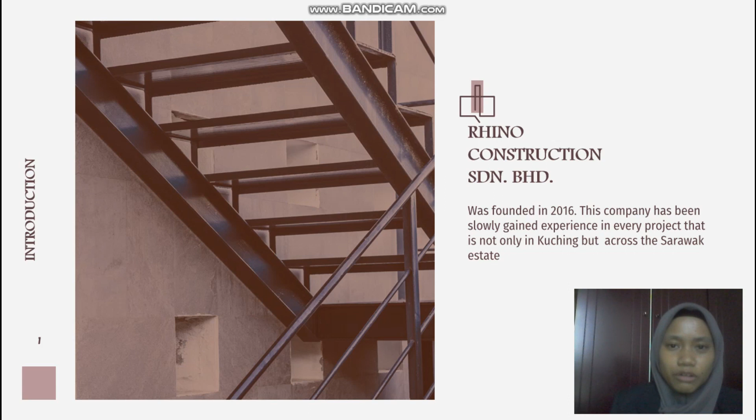Today I am going to introduce our company profile. Rhino Construction Sdn Berhad was founded in 2016. This company has been slowly gaining experience in every project, not only in Sarawak, but also in West Malaysia and Sabah.

Mission: our mission is to offer high quality service with reasonable cost in accordance with statutory practice codes of the products and integrity, and a good final product within specified time given. Vision: our vision is to become the most preferred choice by the employers and to be able to be listed among the top competitive companies with higher performance while enriching the communities.

This is our list of completed projects. The first is a purpose-built 78 unit semi-detached house, already done. The second is a new double-story project at 5 Mile Kuching at Samaba Park, completed in 2018. And the Kuching City Drainage project at Padang Merdeka.

Board of Directors: this is our director, Sandra as Chief Executive Officer, Nurul Amanina as Deputy Chief Executive Officer, Siti Nur Khalidah as Project Director, Courteney Ecynne Anak Jeffrey as Human Resource and Administrative Director, and I am Noor Hazmizah binti Kayat as Financial Director.

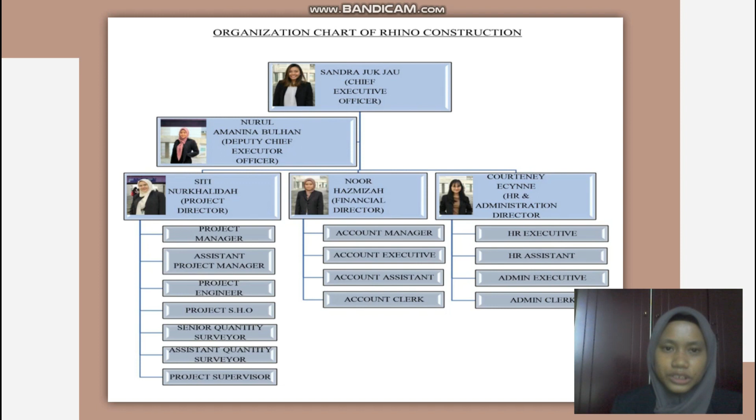This is the organization chart of our company. This is the list of our company registrations: Suruhanjaya Syarikat Malaysia, Lembaga Hasil Dalam Negeri, Construction Industry Development Board (CIDB), Bahagian Pembangunan Kontraktor dan Usahawan (BPKU), Unit Pendaftaran Kontraktor Negeri Sarawak (UPK), Kementerian Kewangan Malaysia (KKM), Kumpulan Wang Simpanan Pekerja (KWSP), and Pertubuhan Keselamatan Sosial Malaysia (PERKESO).

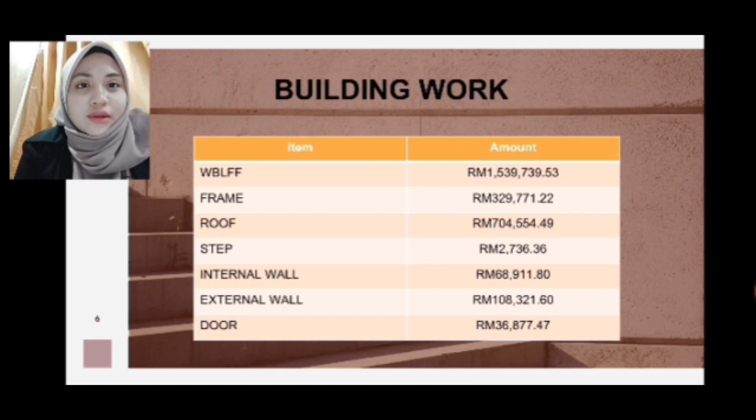2,736.36 ringgit Malaysia. The fifth one is internal wall. Internal wall is also a very important component in the building works, and the price of internal wall is 68,911.80 ringgit Malaysia. External wall and door, they got 14 items in the building works.

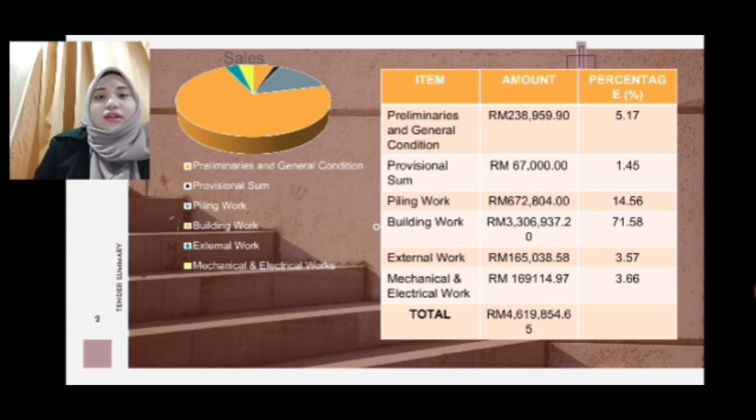As I mentioned before, the total of building works is really high, which is 3,306,937.20. So that's all for me. I will explain about another part, which is in the task break. Thank you.

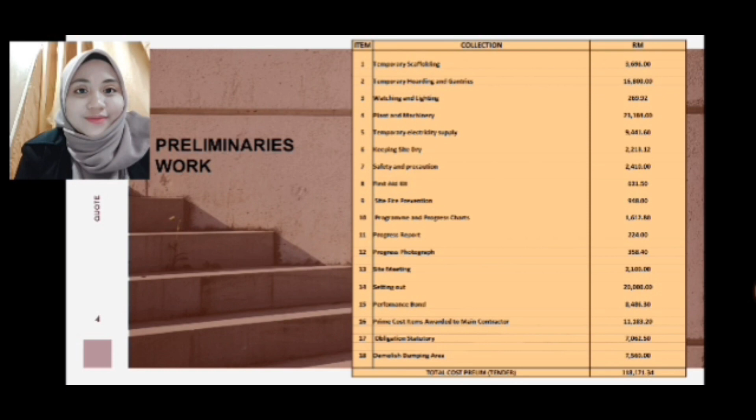So as for my part, I'm going to summarize the tender summary for task 2. The total summary for piling work is 672,804 ringgit. The material used is precast concrete pile.

So as for the next one, the total summary for building work is 3,306,937 ringgit and 20 cents. This table shows the elements for the building work included for the construction project, which is work below lowest floor finish around 1 million, frame 300,000, roof 700,000, step 2,000, internal wall 68,000.

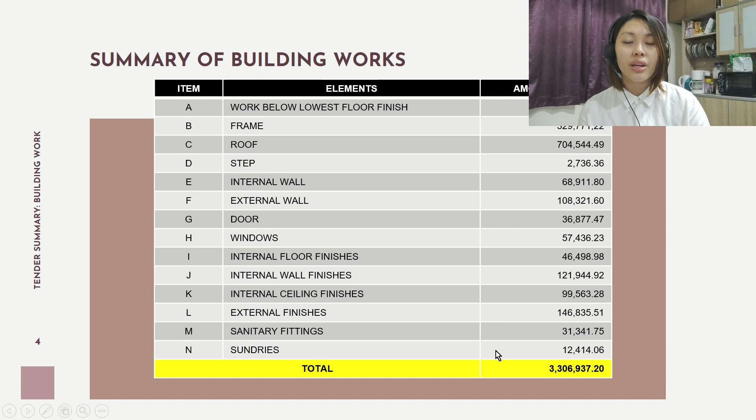External wall 104,000, 108,000. Door 36,000. Window 57,000. Internal floor finishes around 46,000. Internal wall finishes around 121,000. Internal ceiling finishes around 99,000. External finishes 146,000. Sanitary fittings 31,000 and sundries 12,000. So the overall of the building work is around 3 million, 306,937 ringgit and 20 cents.

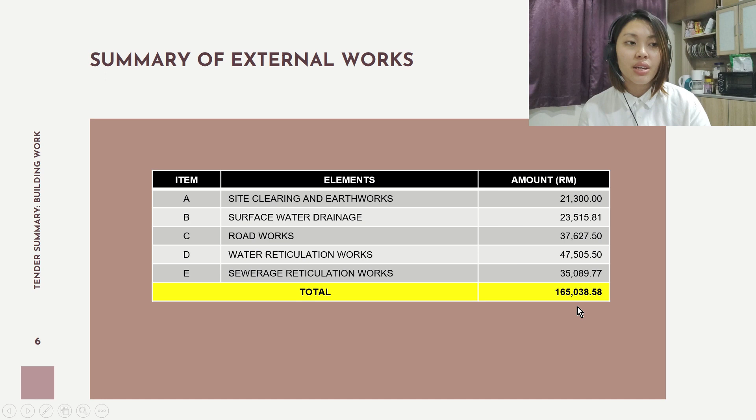And the next is the total summary for external work, which is 165,038 ringgit and 58 cents. And these are the elements included for the external work, which is site clearings and earthworks around 21,000, surface water drainage around 23,000, roadworks around 37,000, water reticulation works around 47,000, and sewerage reticulation works around 35,000. So the amount is around 165,038 ringgit and 58 cents in total.

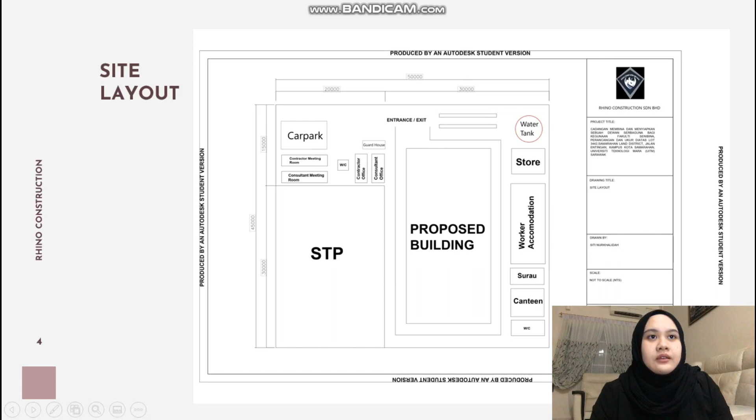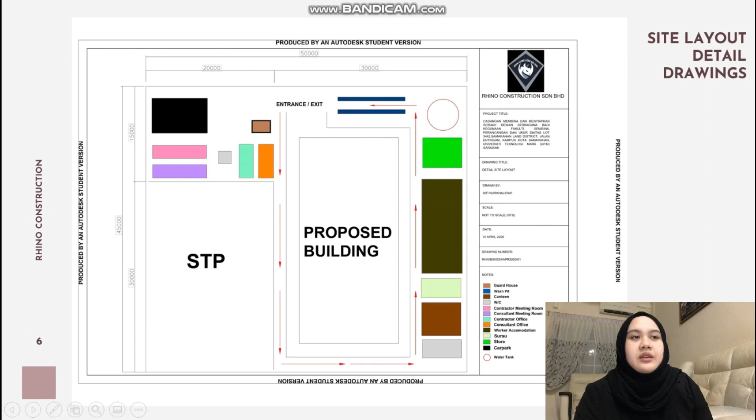Temporary buildings such as site office, meeting room, canteen, guardhouse, temporary storage, portable toilet, workers' accommodation, and wash pit, demolishing, dumping area, signboards, and so on - that is the temporary buildings.

And then the piling works. The piling works takes about 60 days, so it starts on 15th May 2020 and finishes on 23rd July 2020.

And then the building works takes about 315 days, so it starts on 10th June 2020 until 19th May 2021. This is all the building works.

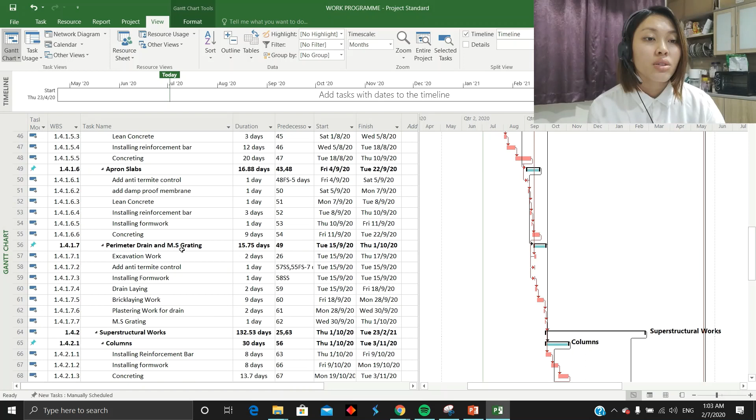After the excavation work is done, anti-termite control will be added because it is below ground level, to prevent termites from destroying the material and quality of the project. There is a minus 7 days here because the anti-termite control can be done right after the curing process of concreting for the apron slab.

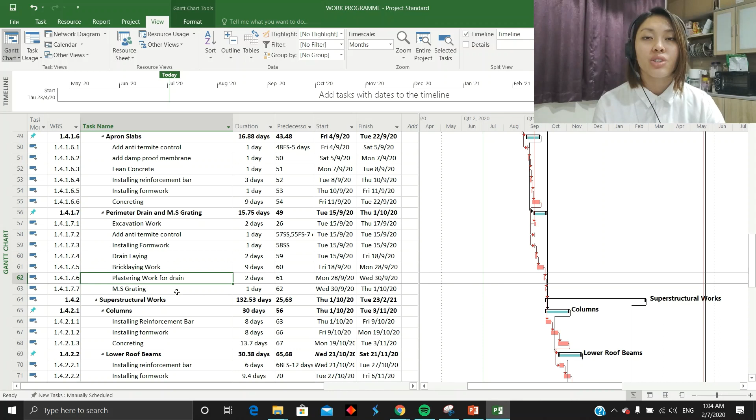After the anti-termite control, they will install formwork, followed by drain laying, bricklaying work, plastering work, and installation of the MS grating for the drain. After the perimeter drain is completed, the next task will be the superstructural works, carried out right after the lower floor finish work is completed.

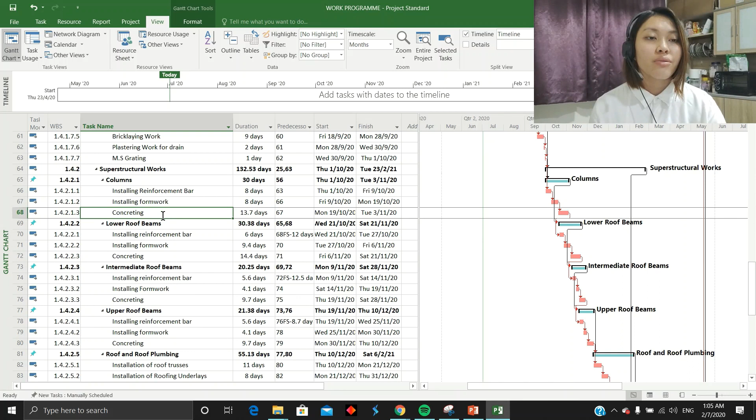The first task is the column, which compulsorily includes rebar, formwork, and concreting. After that, the next task is the lower roof beam. The installation of the rebar has a minus 12 days from this date, since the reinforcement bar can be done right after the pouring and concreting work for the column.

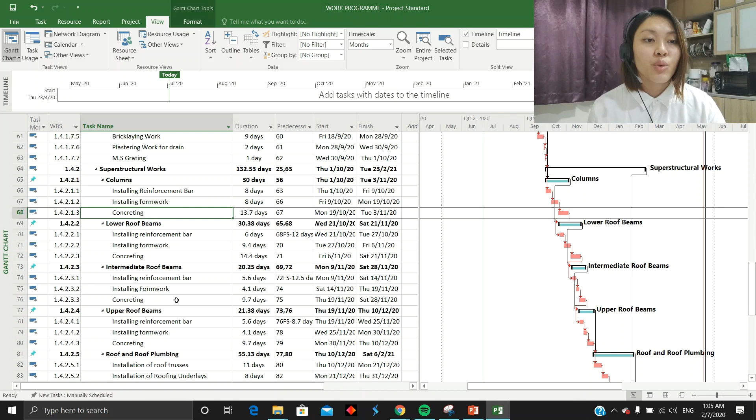After that comes formwork and concreting. After the lower roof beams, there will be intermediate roof beams. Similarly, the reinforcement bar can be carried out after the pouring concrete process is done for the lower roof beam, although it has to be done stage by stage. Then the next step is formwork and concreting.

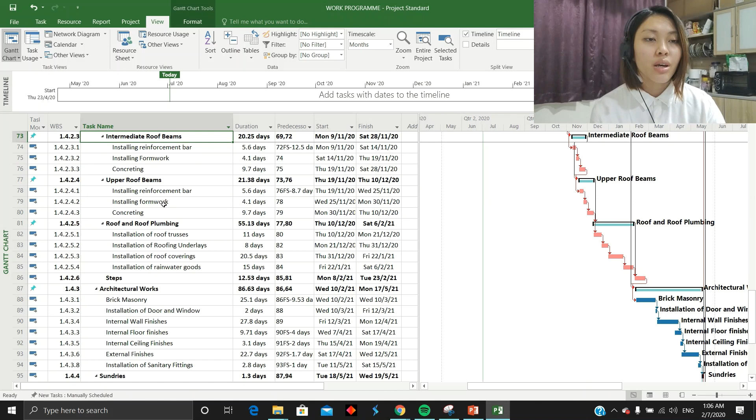After the intermediate roof is done, there will be an upper roof beam for the project. Here the rebar can be installed right after the pouring concrete process for the intermediate roof beam, followed by formwork, which can be done right after the concreting work. The last task for the upper roof beam will be concreting.

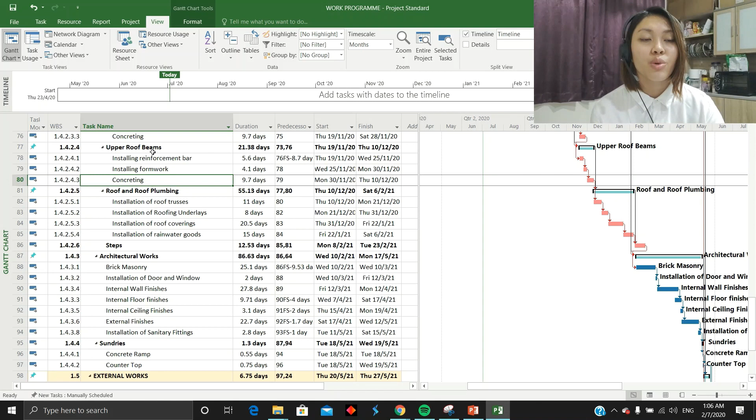Once the roof beam is done, there will be roof and roof plumbing. These tasks will be done in sequence to avoid being hectic. The roof trusses will be built in 11 days.

Right after the roof trusses, the roofing underlays will be constructed, followed by roof covering, which is zinc. After the roof covering, there will be rainwater goods — the last process for the roof and roof plumbing.

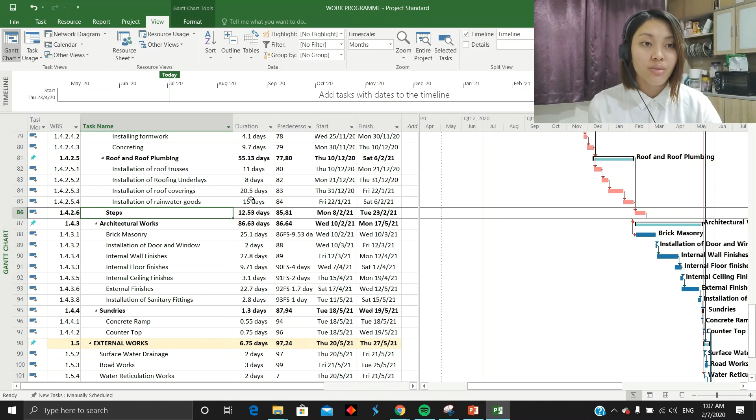After the roof and roof plumbing works are done, the next task will be steps or stairs for the hall of the project. The step may take up to 12 or 13 days — assume 13 days — and it is carried out right after the rainwater goods is constructed.

After that, there will be architectural work. The first archi work is brick masonry, including the internal and external works for the project. There is a minus 9.53 days here.

The minus 9.53 days is because of the curing day for the step, so it can be done right after the pouring of concrete for the step. The step is quite small, so it can be done quickly with only one or two workers needed. So to reduce the duration, the brick masonry should be done quicker.

After brick masonry is done, which includes internal and external walls as stated before, there will be installation of doors and windows. Doors and windows can be done in two days to reduce the duration, and it can be done very fast.

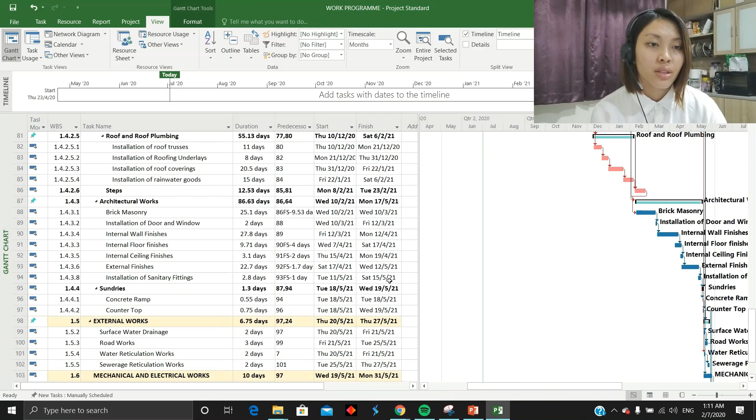So after that, the next external work is surface water drainage, and it can be done right after sundries, followed by the road works. As for the water reticulation works, it needs to be done at the very initial stage of the project, which is around right after site clearing and earthworks, to avoid unwanted problems or failures.

Because the water reticulation works is constructed below, under the building, it has to be done at the initial stage. After water reticulation works is done, the next task will be sewerage reticulation works, which can be done right after water reticulation works. So the next one will be M&E works, mechanical and electrical works. M&E work can be commenced right after the completion of sundries, or right after the completion of the building works, to avoid messy and hectic problems.

After the M&E works is done, then there will be the professional sum. For the signage, it can be done right after sundries too. For the flag poles, it needs to be carried out right after the road works is done, followed by the built-in furniture, which will be constructed right after every task, every work for the project is completed. So it is the last physical work to be involved in the work program. According to this schedule, the project will be completed on 4th of June 2021.

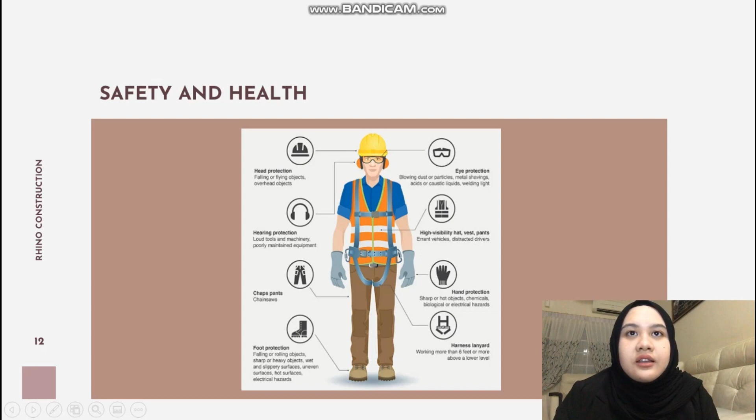Next is safety and health reports. This is basic safety and health: we need to wear head protection, hearing protection, eye protection, and all of this. This is the toolbox meeting, an informal safety meeting. It is a safety method of work on site.

This is the activity report. The types of accidents are: electric shock, minor injury, falling from height, specified minor injury, near miss, possible dangerous exposure, exposure to chemical, burn, and falling material. The total number of accidents for electric shock is 2, minor injury is 3, falling from height is 2, specified minor injury is 1, near miss is 3, possible dangerous exposure is 2, exposure to chemical is none, burn is none, and falling material and equipment is 3.

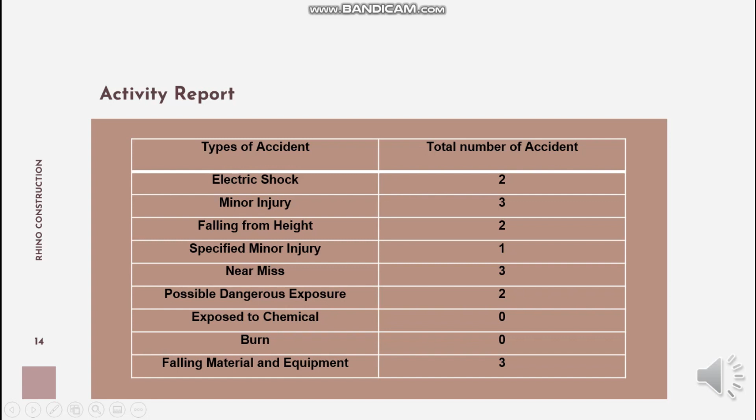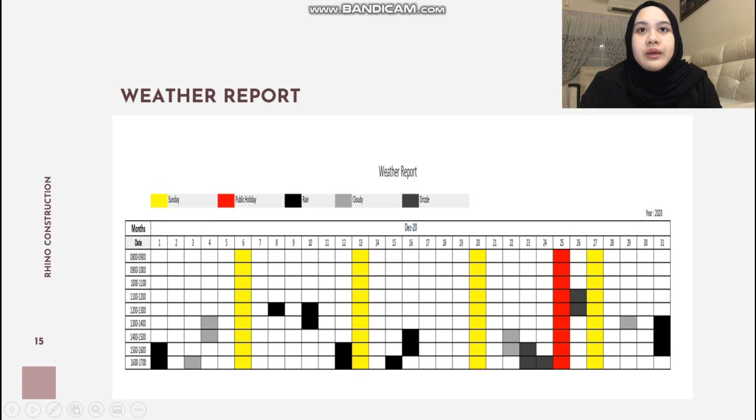Next is the weather report. So this is the weather report. The yellow is Sunday, and the red one is public holiday. The black color is rain, the light gray is cloudy, and the dark gray is drizzle on the weather. So this is the weather report.

Now I am going to present task 4, which is project management, and I am going to present about the safety implementation plan of the project.

A safety implementation plan is a way and steps to reduce and minimize any risks and hazards, and to prevent fatality among all construction workers involved on site. Construction is a very dangerous place to work, and workers tend to be more exposed to fatality, like falling from height, getting shocked, or being knocked by plants and machineries. So it is important to make this safety implementation plan, as it is part of the rules and regulations of OSHA too. All of the implementation created by us will be practiced by all of the construction teams involved in the project.

So this is the objective of a safety implementation plan: to ensure successful project delivery and stakeholder satisfaction, and to introduce the best management practices to initiate, carry out, and close the project.

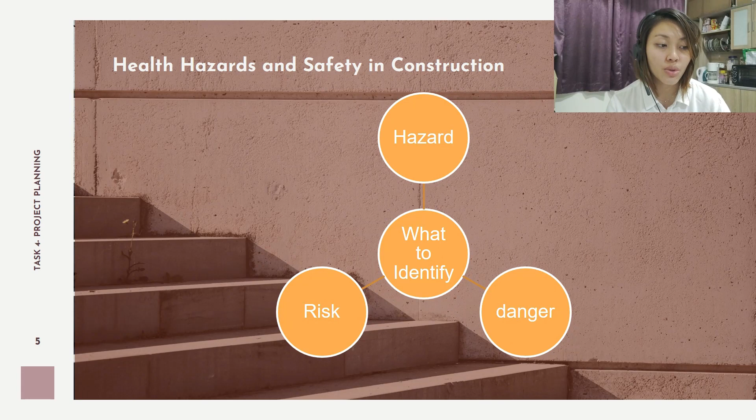And then we will implement corrective measures and identify the methods. Other than that, for risk control, we will commence to eliminate and minimize the hazard.

So the next one is safety and health management. This is a very systematic way of managing the safety and health of the project on site. The importance is to minimize the dangers and provide a safe work environment, and to protect the well-being of each worker.

For proper management, we usually provide policy formulation and competence and training for each employee, a site safety checklist, documentation and reporting, which is very important, communication among each staff, and we also apply the corrective and preventive action, which is CAPA.

These are the corrective and preventive actions to be taken, and we apply the 8D methodology for the CAPA creation. The first one is to plan.

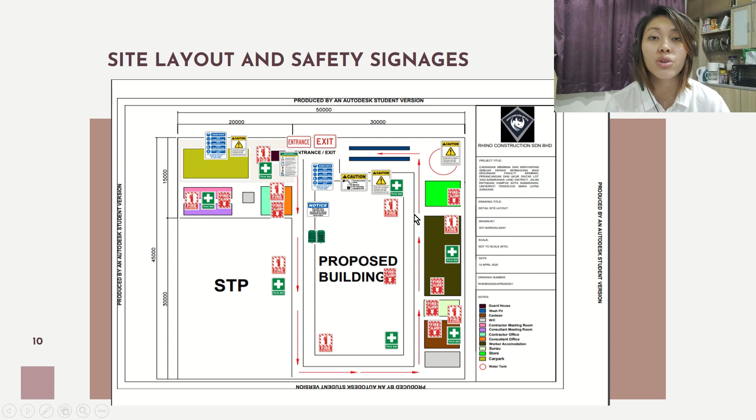And the next one is monitoring the workplace of OSH, to monitor the project from time to time. And the next one is the workplace OSH inspection. This is an inspection of OSH that will be made, whether it is informal, general, or the critical parts.

So what to do if any accident happens? We will make a statutory notification and reporting. Next, we will investigate the problems with procedures. And the next stage, we will do reporting and keeping about the problem.

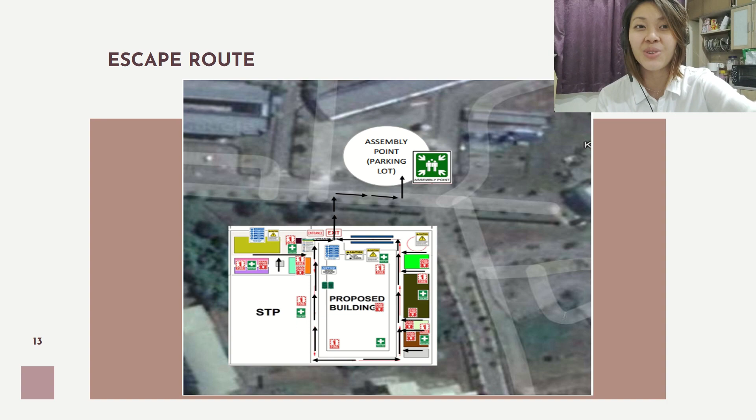What is the importance of a safety manual? Employers are responsible for providing a safe workplace environment for their employees or workers, free from harm, health hazards, harassment, and others related to safety and health.

Next is the site daily report. What is the importance of the site daily report? It helps in refreshing our memory about activities at the construction site, and record keeping in a construction project helps you get clear insight into what happened on the site.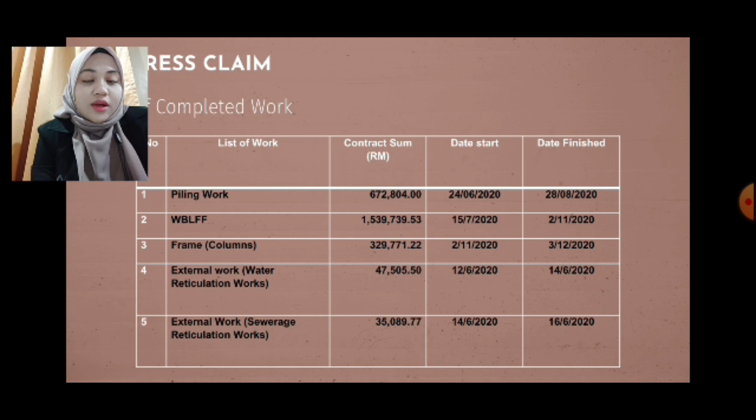So next is the current work progress. Same goes as the previous one — the contract sum can be obtained from the cash flow or the tender summary. The date start of preliminaries is 4th May 2020, and the date finish will be on the 16th July 2021.

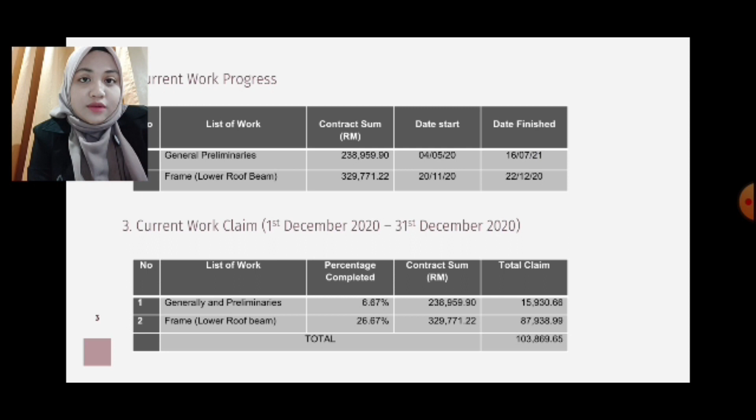So current work claim is actually for interim payment 6. This is our summary of claim. As you can see, the contract sum can be obtained from the cash flow or the tender summary.

This percentage, either from the cash flow or CPM — we need to refer to the CPM and also the cash flow. Current work done is obviously from the cash flow.

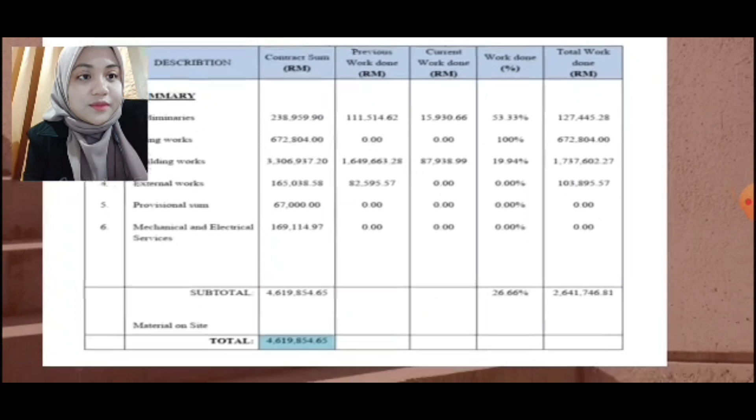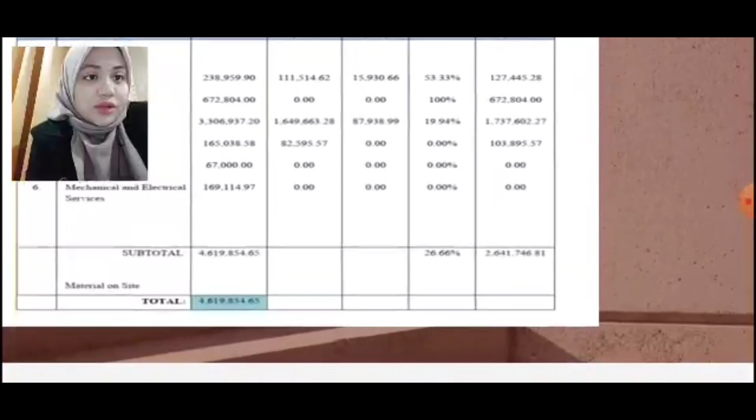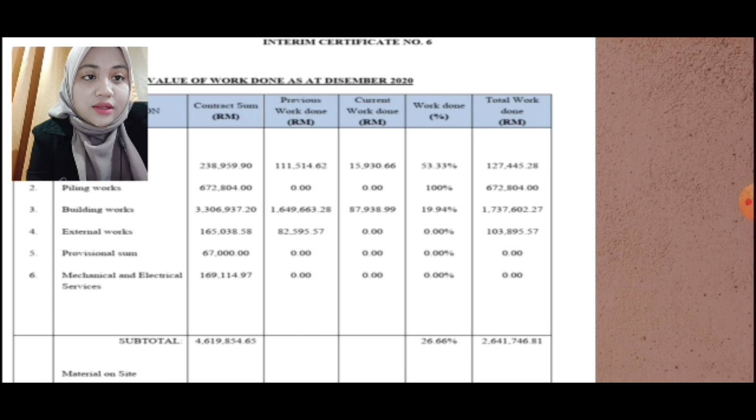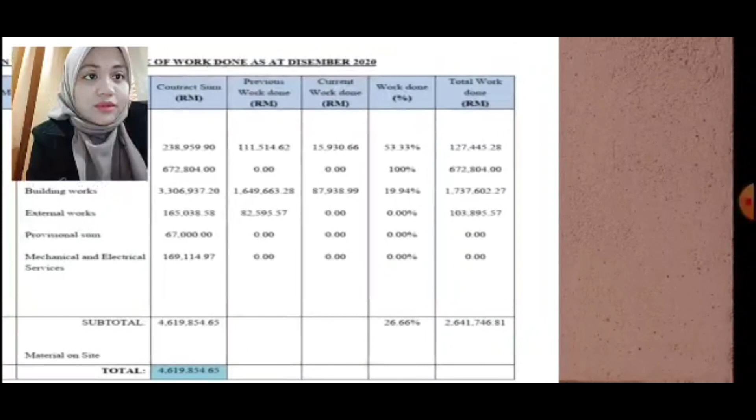This is the total in our contract sum, and this is total work done. How we got the 26.66% is: I got 6 items here. So 6 items, 53.33 plus 100 plus 19.94%, divide by 6. So we got this total work done. This is the subtotal for total work done.

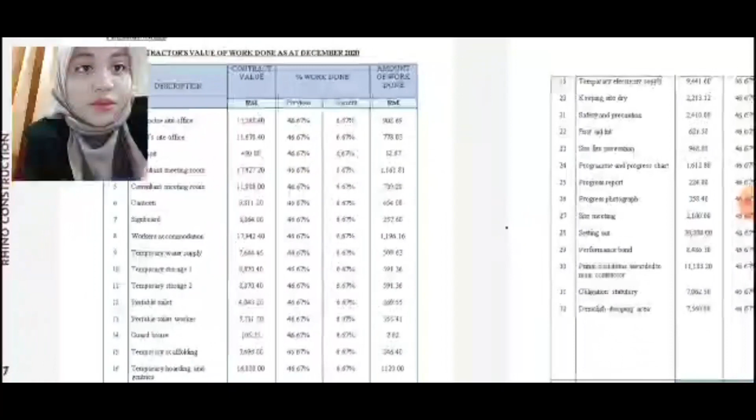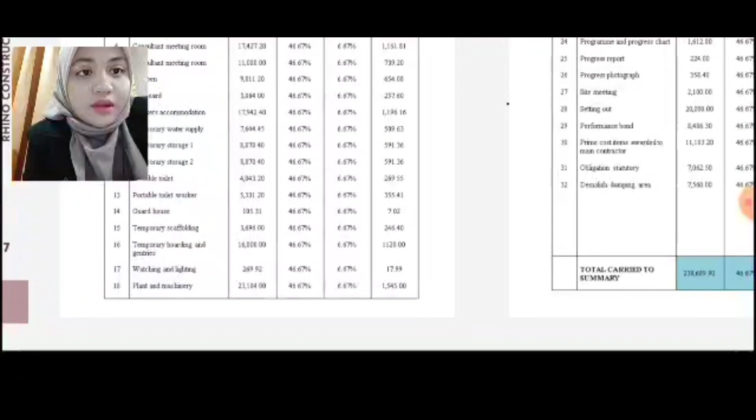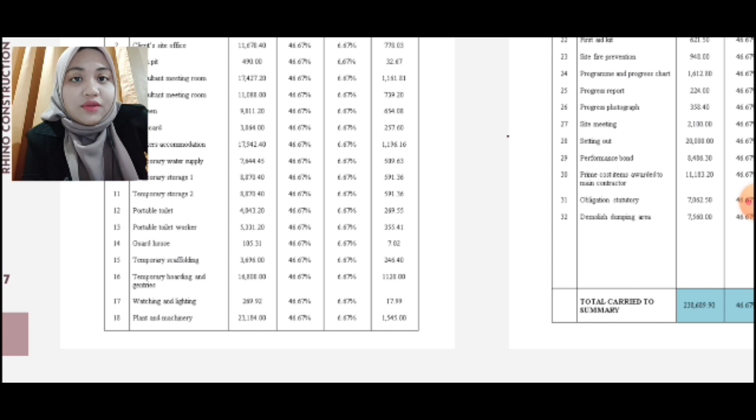Okay, this is preliminaries for interim certificate number 6. How we get the previous and current? For example, I took the temporary scaffolding, 365, 3696.00 divided by 15, so we got 246.40. Why we divide by 15? This is because in our cash flow they had 15 columns. This everything here mostly refers to the cash flow. Same goes to the building works. The contract value also can be obtained from the cash flow, either the tender summary, and how we got the total work done is also the same way I just explained.

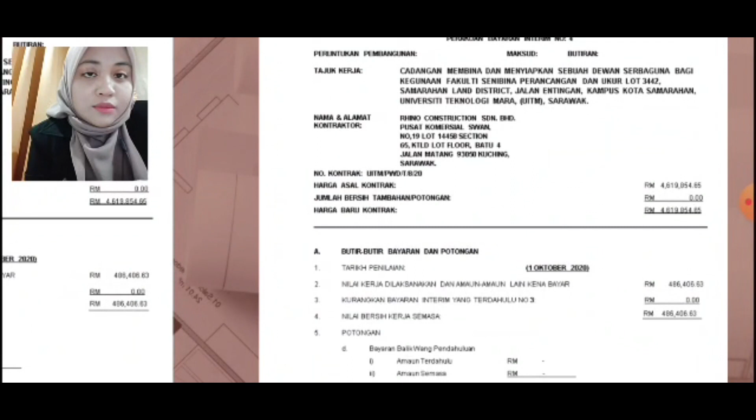So now I am going to present about the extension of time that we have applied for our project.

So this is the extension of time letter that we did to request for the EOT. So we only request for one extension of time, so there is a number 1. So by clause 43.1a, it is based on the JKR contract. So we submit an application for EOT number 1 for a total of 34 working days starting from 23rd of April until 3rd of May. Excluding the holidays, so this is all working days, because this is due to the COVID-19 outbreak, which is under force majeure. It is a pandemic problem right now, and as provided under clause 57.

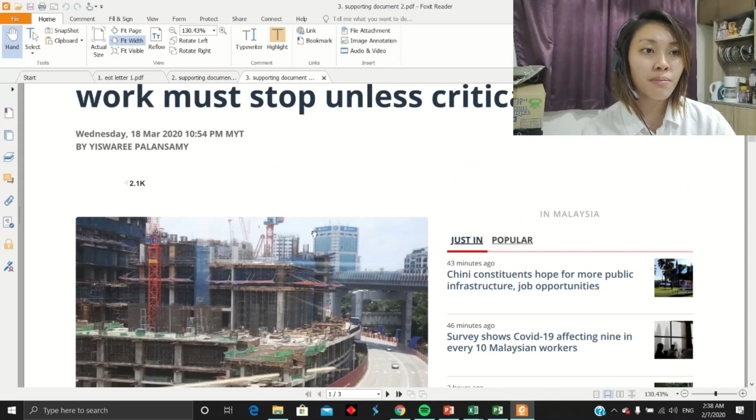So then for the supporting documents, these are the documents that we got from the internet, where Malaysia announced restriction of movement effects starting on 18th of March, which is before the site possession. And for the second supporting document, all of the work, ministry or construction work must stop unless it is very critical and crucial. So the government executed this on the 10th of June, allowing people to go to work at that time.

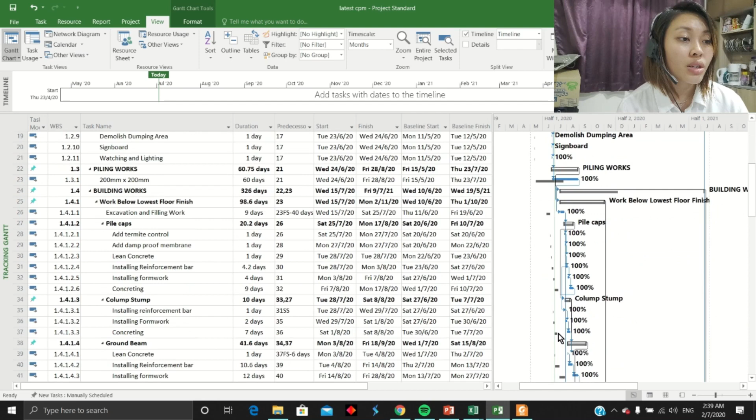And now I'm going to present the work program, the CPM, after the application of EOT. So this is the baseline start, the scheduled CPM, and this is the date after the application for the EOT. So this is how much the delay of the project occurred.

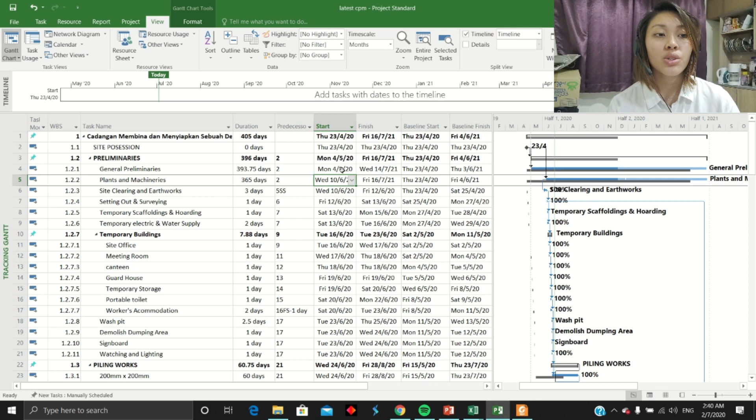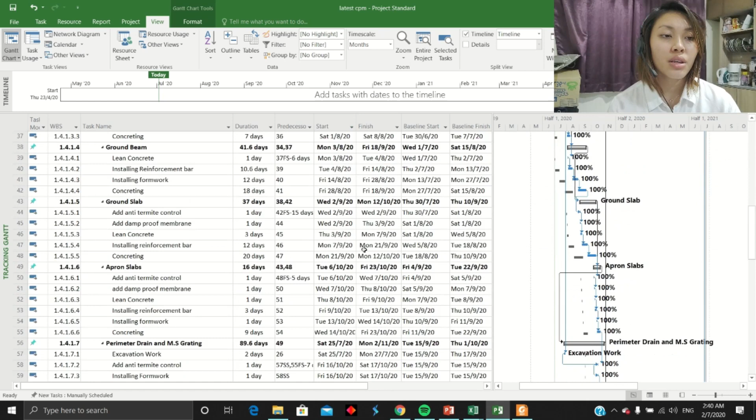As stated in the contract, the site possession is on the 23rd. So because of the COVID outbreak, the general prelims will be paid and will start on 4th of May, as stated in the EOT letter. And the plants and machineries will be started on 10th of June because the physical work will start on the 10th of June. So to avoid the extra cost, we decided to rent starting 10th of June to reduce the cost of extra pay. And this is when the physical work started, so the completion of the project should be on the 16th of July 2021 after the application of the 34 days of EOT.

There will be a delay of around 2 months for signages of provisional sum, 2 months delay for flagpoles, 1 month delay of the built-in furniture. As for the piling work, there will be 1 month delay, starting on June until August, because this is the month the physical work starts to commence.

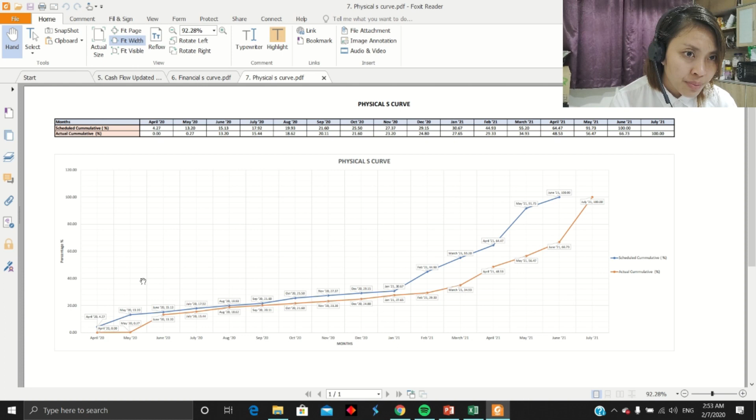There will be no work commenced in April and May, so it is obviously zero. The work will be commenced in June and it starts to rise until here. July has the highest point because it has the most pack and the most higher physical work involved throughout the project.

Next I'm going to brief about the variation order that is made. These are the list of variation orders. First is change the type of window: Alum casement single leaf clear glass window to sliding window.

Third is change the type of door, which is single leaf PVC flush swing door to panel door. For this, the general condition is the agreement between owner and contractor, signed by the owner and the contractor of our company, Rhino Construction Sendirian Berhad.